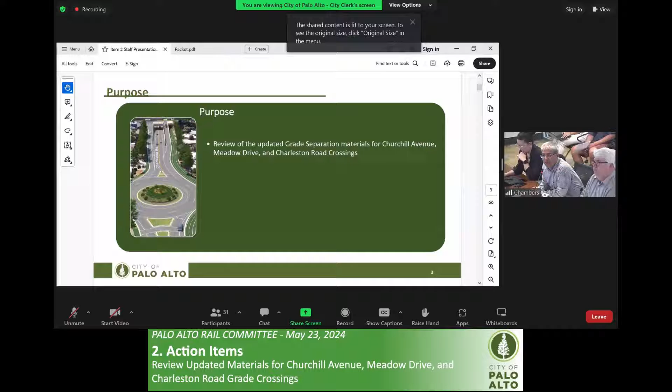So the main purpose of our project today is to review these updated grade separation materials that we have available. I'd like to note that the City Council just awarded the amendment on May 6th, so these updates are very recent and therefore available today to the audience as well as to the committee. We would like to highlight some of these changes that have been done over the last few weeks. Next slide, please.

For the benefit of our audience, I know we have a lot of new faces and we have been contacted by several residents in the project vicinity about the project. So the objective here is to share some of the background and perspective of the history on the project.

The project has been ongoing, like Chair mentioned earlier, about 10 years now. The project had to go through the community advisory panel and extended community advisory panel through the review processes of these different alternatives that were prepared. Heavy community involvement was there, and they helped us design some of these underpass alternatives, came up with these ideas which were refined further by our consultants. We have gotten extensive feedback and input from our community in refining those alternatives.

City Council in August and November of 2021 reviewed these recommendations from the extended community advisory panel and the concept plans, and selected a preferred alternative for Churchill Avenue as a partial underpass. For the Meadow and Charleston alternative, City Council selected 3 alternatives to be considered further for more studies and refinements, and to be brought back to the Rail Committee for discussions and reviews, so that the Rail Committee can make recommendations to the City Council for proceeding forward with the preferred alternatives.

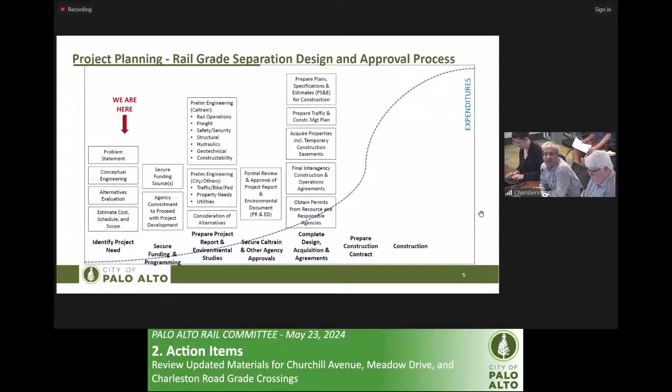In this phase, the planning for our project is just to get into the next phase for preliminary engineering and environmental review, where we can develop more details and look into the property impacts more carefully. Right now, we don't have any topographic surveys.

We do not have any property boundary lines. We are putting that based on very preliminary and aerial information that's available. So the project going into the preliminary engineering phase will allow us to do some more detailed design. The second thing I'd like to note is that this is a starting point from where we would be looking at refining further to reduce any impacts to the properties.

Like the Chair mentioned earlier, the City Council has already directed staff to reduce impacts onto the properties. That is one of the intents in the preliminary engineering phase: to get the design into more accurate detail and do more work to look into how we can refine it and reduce those impacts onto those properties—not just reduce impacts, but maybe eliminate the number of properties having right-of-way impacts.

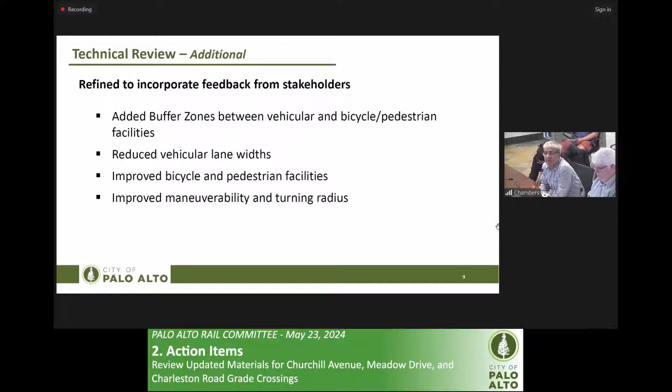City Council also asked staff to engage with Caltrain, and staff brought in Caltrain at different levels of communication, with city and county staff coordination group meetings and local policy makers group coordinations. In addition, we engaged them through the Caltrain corridor strategy project, which reviewed corridor-related standards and concerns up and down the corridor for different projects. We also had a special agreement with them to review our project plans and alternatives, and they provided feedback on those plans.

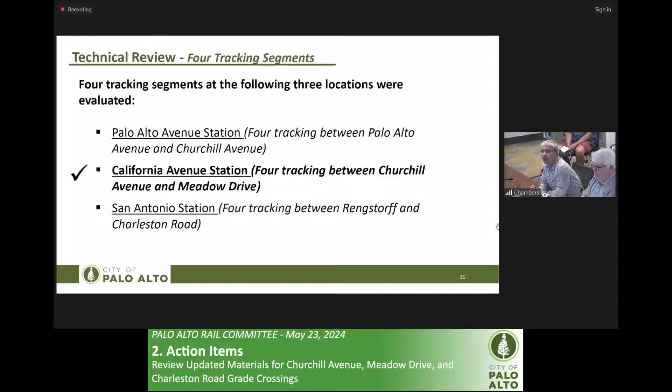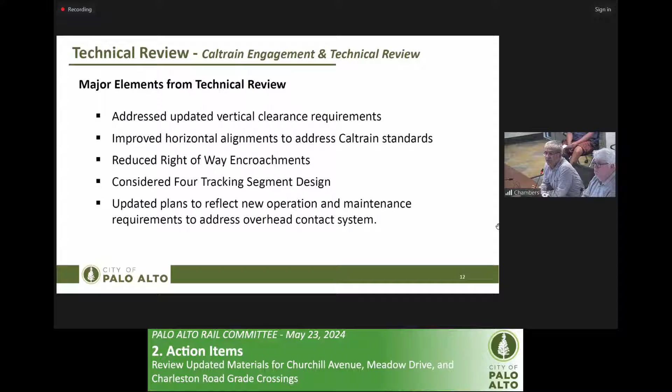They also provided several technical comments, some of which related to vertical clearance and standards. Caltrain had recently updated their standards, and now our projects are required to comply with those newer standards. We had to review our plans to ensure our designs could meet those requirements, or ask for a variance where needed. Vertical and horizontal alignments, right-of-way encroachment into the Caltrain right-of-way, and four-tracking segments were all looked at, from the operational and maintenance point of view, to make sure our future project would comply with the requirements.

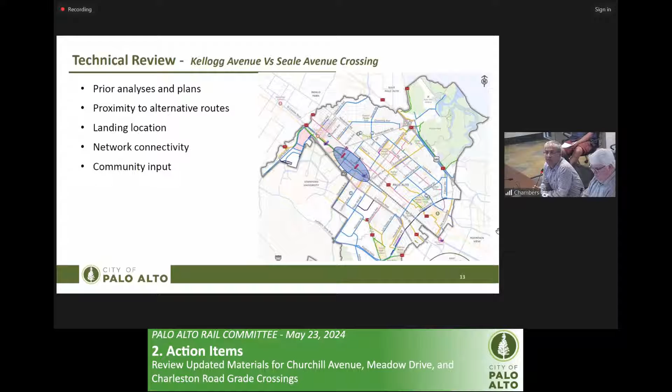Council also asked the Rail Committee and staff to look into the preferred crossing location for pedestrians and bicyclists for the Churchill partial underpass crossing. The two locations considered were the Kellogg Avenue crossing and the Seale Avenue crossing. Our bike and ped transportation analysis, with feedback from the community and input from outreach, along with other factors including existing plans and network connectivity, led to Seale Avenue being the preferred location. The Rail Committee has endorsed that location for recommendation to the City Council.

Finally, we understand how recently our community has been engaged on the property impacts. We'd just like to note that the project is still at a very early stage of development—if we were to look at a scale of 1 to 100, we are only at about 5% development stage. So this is a very early phase, and the project's intention is to understand which properties may be involved in those impacts, recognizing them early and having those conversations with the community. We are being transparent and open at this early stage so that people are involved and understand. The Rail Committee has also directed staff to reduce those property impacts as we define the design in our next phase of preliminary engineering.

So it's just a starting point—this is where those comments and impacts currently stand, and we are considering further reduction from this point to see how much we can work to reduce those impacts to those properties.

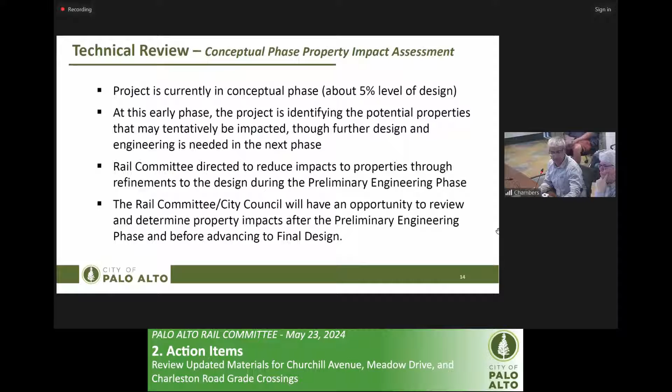Next slide, please. We'd like to note that our project does have both federal and state funding. Typically, these large infrastructure projects have federal and state funding involved, and the city has to follow strict and stringent requirements for real property acquisition processes, for evaluation as well as fair market value determination, and for negotiations with property owners if required, if property acquisition is required.

So as I mentioned, the grade separation project does have both CalSTA, which is the TIRCP funding we were talking about, the state funding, and the FRA agreement that the rail committee recommended today, which is federal funding. Both federal and state level funding are involved in this project.

Next slide, please. We do have some frequently asked questions, because the community has reached out with several property acquisition questions. This is a highly regulated area, and we have some projects that have recently gone through property acquisitions which provide good samples of the process. The frequently asked questions we're sharing here, and these links, can provide you with some commonly asked questions about the right-of-way acquisition negotiation process. We cannot get into the details of each property owner at this point because we don't have that level of detail, but typically it is done after the environmental impact report is completed, or it can be done concurrently if the Rail Committee or the council so desires.

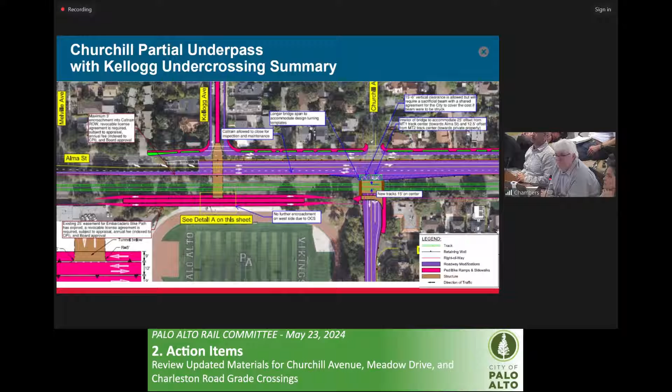This is a view looking south. I just want to touch upon the basis of the bridge and road geometry updates. We basically maintained the southbound track where it is today. We went 15 feet off that alignment for the northbound track. And then the edge of deck of the new bridge is 25 feet off of that to accommodate the spacing for the OCS poles and the maintenance road.

There's actually a cross section of this shown on an upcoming slide for Meadow. It's the same cross section. The total bridge width is about 55 feet. On previous renderings and exhibits, it was 45 feet. So it's a little bit wider now again to accommodate that maintenance road.

This results in, after all those dimensions are settled, a minor 3-foot encroachment of Alma Street inside the Caltrain right-of-way. So there is still some encroachment, but meeting Caltrain's requirements, we're relatively comfortable, and I think they've given even verbal concurrence that the geometry looks good. Next slide.

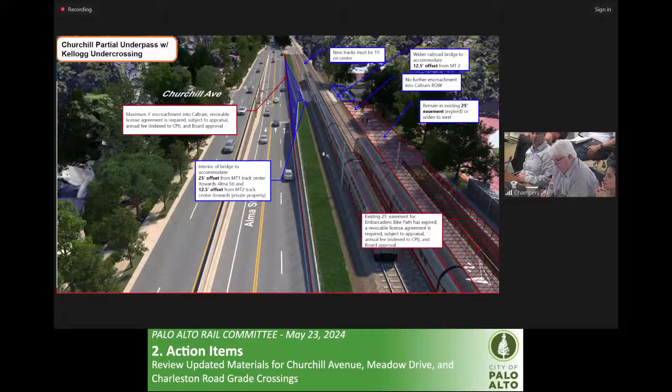This slide here is just a summary of the items we just discussed. I'm not going to go ahead and read all of them, but we could go ahead to the next slide.

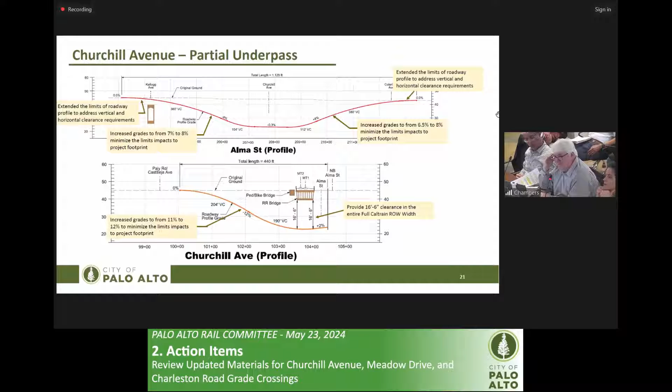These are the revised road profiles to accommodate the additional foot of vertical clearance. There's a slight increase in the maximum grades in the project footprint. I could give you those details if you have questions about that later. I want to keep this presentation moving along because there's almost 40 slides, so I want to keep this as brief as possible. Again, if you have further questions and details about this, feel free to ask.

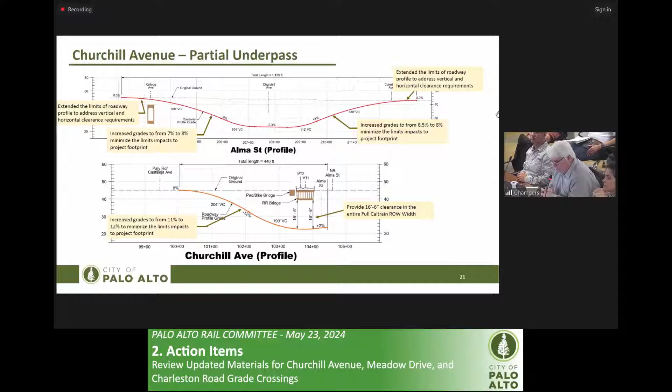Now, I think these grades are a little bit alarming to some, and I just want to remind everyone that pedestrians and bicyclists will not have to navigate these grades since there's a ped bike tunnel currently planned at Kellogg Avenue. Next slide.

Next slide. Here's some of the updated 3D renderings. This is looking northwest towards Pali High in the background. This is a pretty good view of the longer span and maintenance road. You could see there on the bridge, shown in that light tan color.

The right lane on southbound Alma is proposed to be striped with a 2-foot shoulder next to the retaining wall. Again, the spacing is really tight now with the additional width needed for that maintenance road.

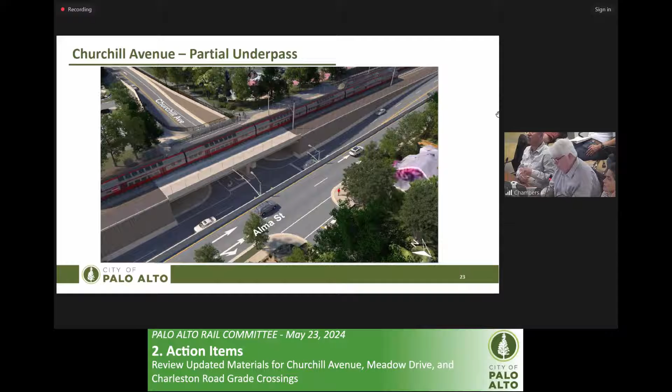Next slide. Here's a couple more views of the 3D model. On the left is looking north from Coleridge, and on the right is a view of the Ped Bike Tunnel at Kellogg from Pali High.

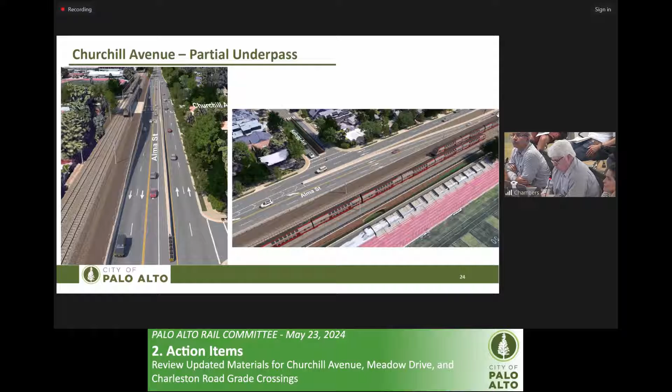Next slide. The image on the left is actually a duplicate from the previous slide, and the image on the right is another view looking north, a little bit zoomed in closer to that lower Churchill-Alma intersection. Next slide.

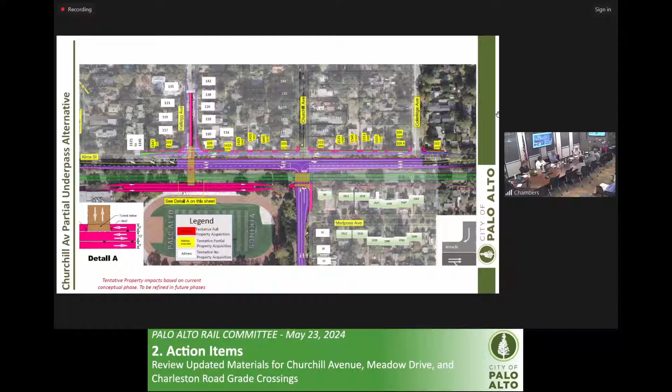Chair, I'd like to note that as part of the city rail committee's recommendations to reduce, we are considering a 1-lane option, and we will be reviewing that in our preliminary engineering phase, to see how northbound on Alma Street, north of Coleridge, would work from a traffic perspective, but there are other elements associated with the design that need to be considered. So as part of our preliminary engineering design, that, and also shoulder widths and other encroachments into the Caltrain, we will still be working with Caltrain to see if we can have additional encroachment, if feasible, by a foot or two, and that might help reduce some of those reductions.

And that shoulder width southbound is now only 5 feet. That's actually the northbound. It's in the lowered section. If we could maybe go back to the previous slide, we could show that real quick.

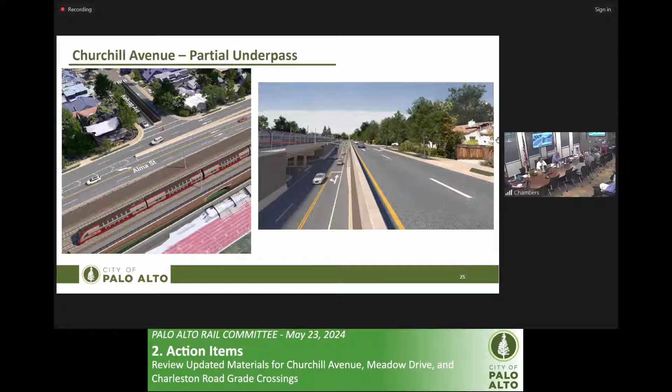I think it's slide 20 or 21. Yeah, 22 maybe? Yeah, there it is.

That is northbound, in the lowered northbound section, through and left lane. It dips down, but it's in the northbound direction. Because there's only 1 lane in the northbound direction, there will be some shoulder to allow for any crippled vehicle to stay on.

There's a few different ways you could lay out the dimension of this. For example, I originally had it laid out with an 11-foot lane next to the wall. And Rippon said, hey, we really should have some shy distance off the wall. I agreed that's probably a better idea, and then we took that extra 2 or 3 feet off, and there was another foot. We gained 3 feet somehow, I forget where the other foot went, but anyway, we adjusted the dimension slightly there.

I just have a technical question, if I may. I'm confused. So northbound Alma in this area, there is both a depressed lane and an upper lane. That's correct - the depressed lane is if you're trying to turn into... That's right. Okay, you got it. Yeah, I missed that. Okay, thank you.

So we go back to slide 26, I think is where we left off. The property impacts - this is a graphic summary of the property impacts, and there's really nothing new to report here. The curb line that we showed at the previous meeting along those homes on Alma Street has not been moved, we kept that where it was before. This results in 15 partial acquisitions between Melville and Lowell, as you can see here indicated in the yellow highlighted color.

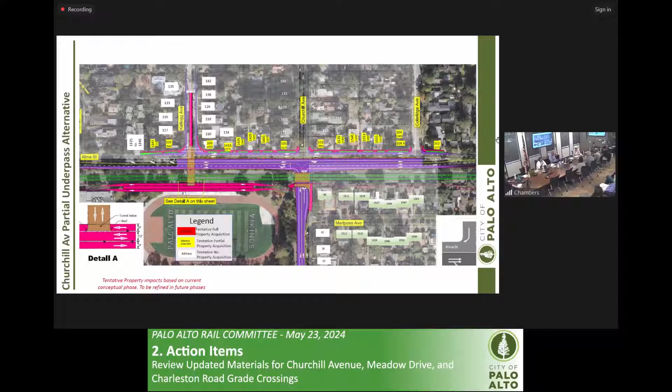So as we did at Churchill, the bridge is slightly wider to accommodate the maintenance road on the Alma side of the tracks. And due to the jogs in the right of way at this location, Caltrain requested that the tracks be shifted slightly to the west. Again, this is related to preservation of the right of way and the alignment for the 4 tracks just north of here. So we made those revisions, and then these revisions also include that 1 foot additional vertical clearance that we mentioned before at Churchill. That applies everywhere - that 16 feet 6 inch new requirement.

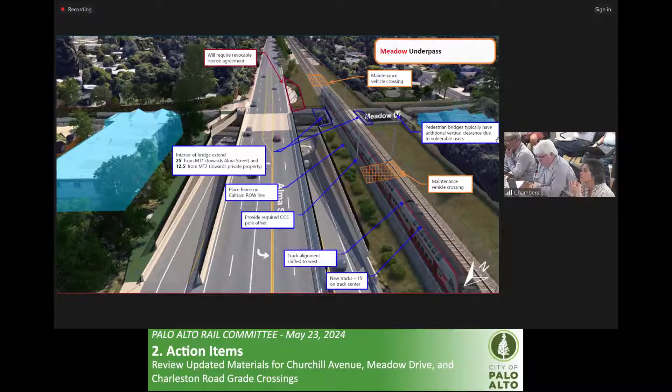Again, this is just a summary of the Caltrain comments with the view looking south, with some of the points made previously. And we have some renderings here to share. Next slide.

Yeah, this is just a slide summarizing the revisions that we made. Discussed that already. Next slide.

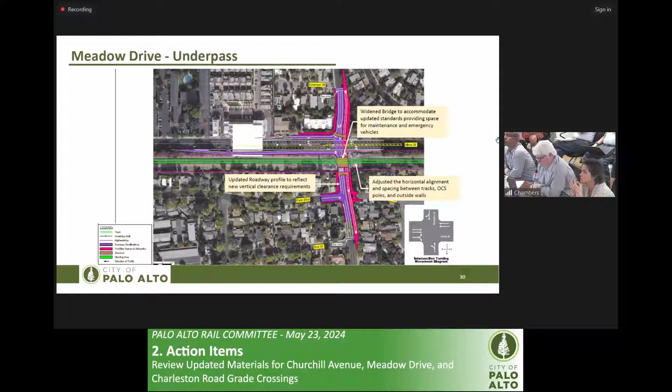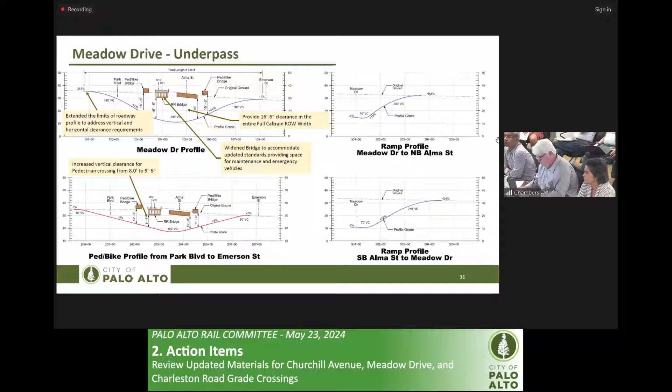Next slide. Here's the typical section of the railroad bridge that I was mentioning earlier. These are the same dimensions used at Churchill. It's got a total width - the text is a little hard to read - I think it's 54.5. So you can see there that 12-foot width is for the maintenance road on the left, and the 13-foot spacing from the pole to the center of the northbound track, 15-foot spacing to the southbound track, and then 12.5. Yeah, the cross section on the lower right.

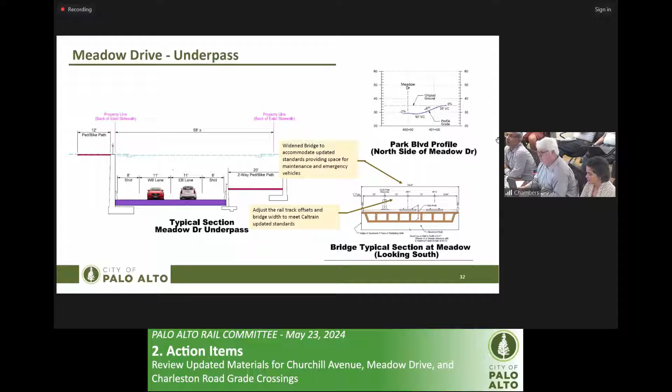Okay, next slide. Here's some renderings. This is a view looking southeast from Park Boulevard. We found a slight error on this that we're currently looking to update before the June City Council meeting. The maintenance road here is shown on the west side of the tracks - it should be shown on the east side like it's shown at Churchill. So we'll get that fixed up for the next council meeting.

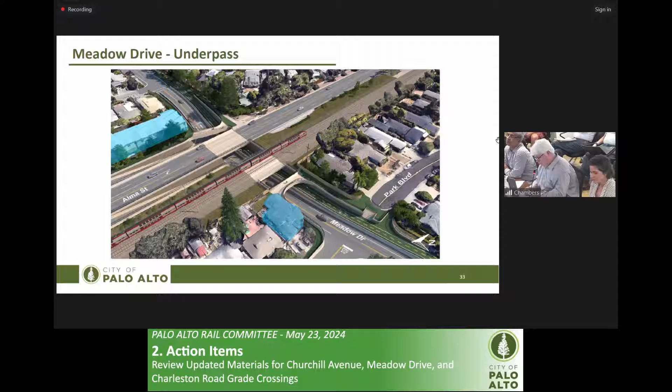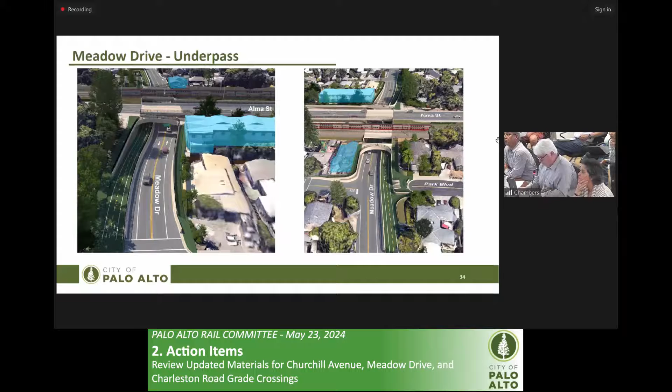This is a view again for the meadow, looking north. Again, really no change to the road geometry here, so this shouldn't be anything new on this slide.

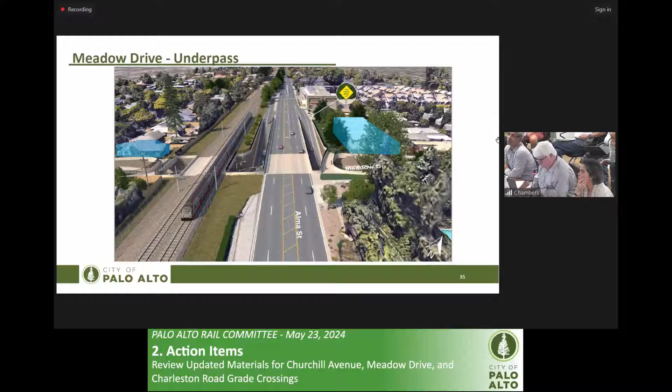All right, that's all we have at Meadow. Should we move on to Charleston? All right, let's do it. Next slide, please.

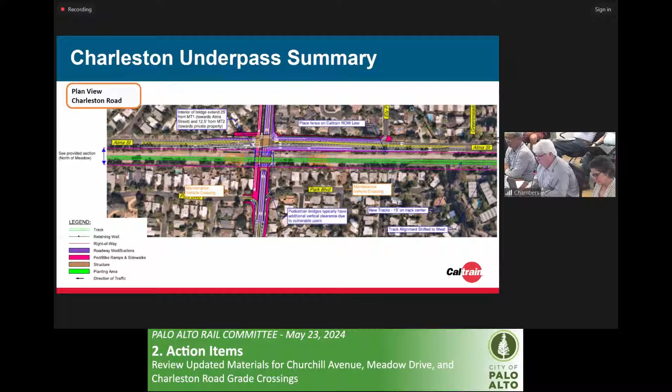This is essentially a carbon copy of Meadow. Again, there's a shift of the tracks to the west slightly and a wider bridge to accommodate the maintenance road. These changes, as I mentioned before, show the new vertical clearance requirement by Caltrain.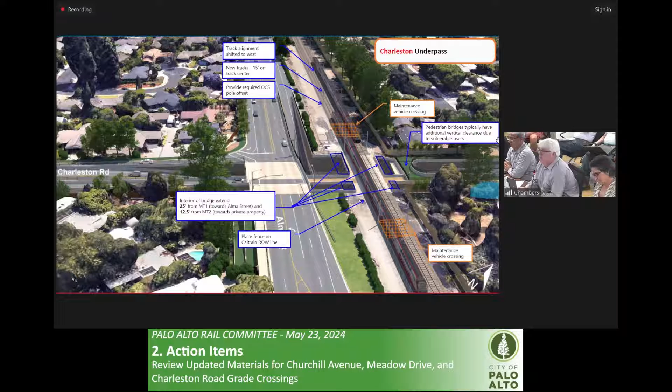Here's a view looking south of the revisions that we just talked about. This is a summary of the revisions in the plan view exhibit, and this is just an overall view of the project. At this 10,000 foot level, there's really not a noticeable change.

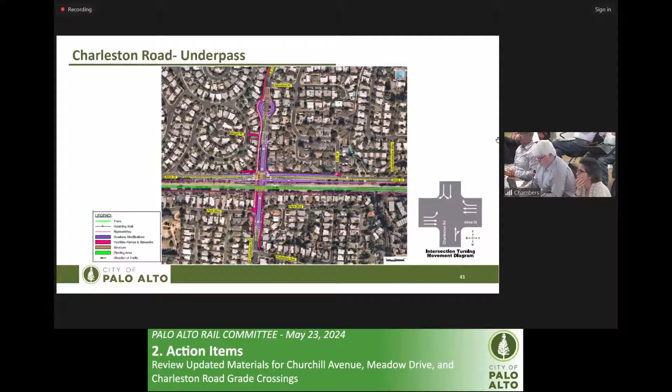These are the updated road profiles. The length of the Charleston profile increased just a very small amount. Same at Meadow, it just increased a small amount, I think by about 2%, from about 710 feet to about 725. I was a little surprised that it wasn't more significant than that, but that's what it came to.

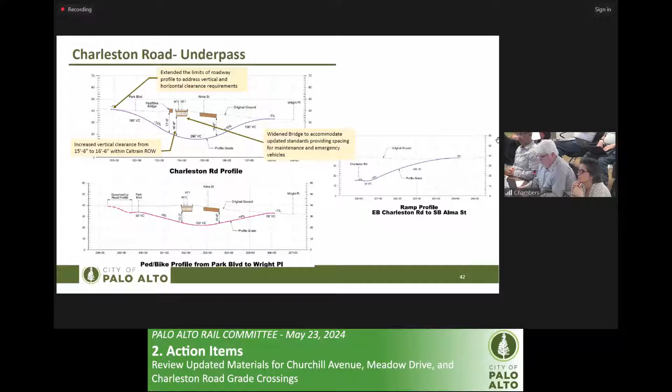These are the typical section of Charleston. Again, no change here. This is what has been presented before at previous meetings.

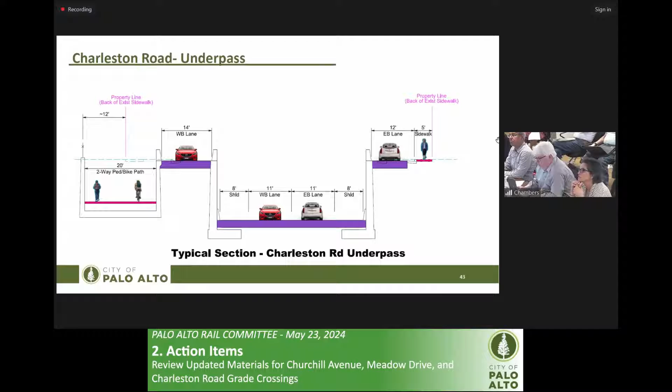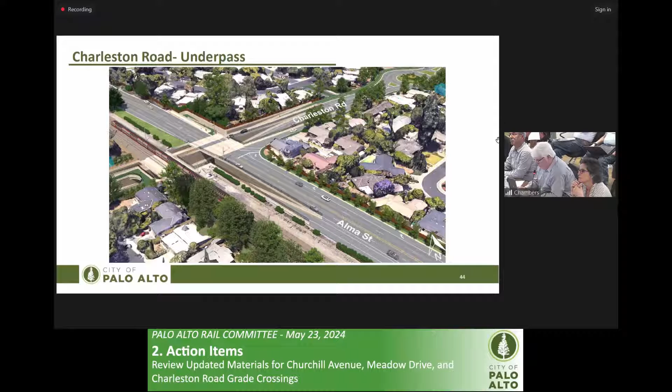Here's an updated rendering looking northeast from Park Boulevard. Again, I apologize, same as we have in Meadow, we have the maintenance road shown on the wrong side of the track, so that will get cleaned up for the next meeting.

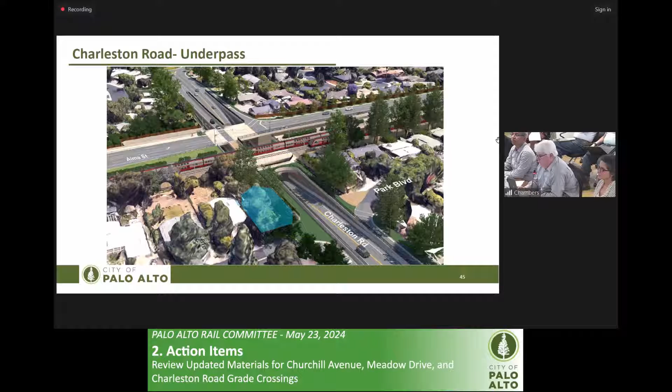This is a view looking southeast from Park. Again, you can see the wider railroad bridge there in the middle of the screen. View on the left, that's looking west, and view on the right is an aerial also looking west.

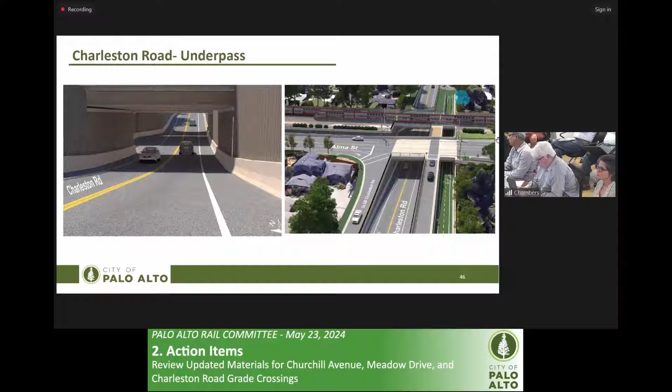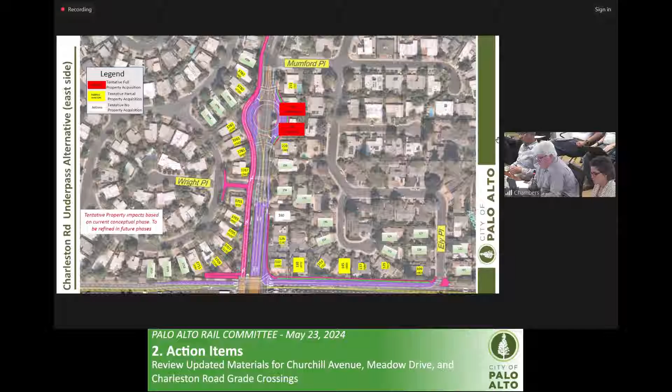Next, we're going to talk about the Meadow Charleston hybrid. Could you just add up the total and fulls for Charleston? At Charleston, I believe there's 30 partial acquisitions, 8 on the west, 22 on the east, and 3 full acquisitions total, 1 on the west, 2 on the east.

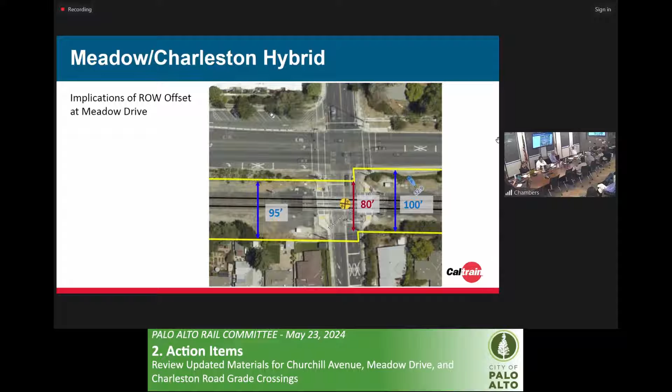Due to the jog here in the right of way, shown here in yellow at Meadow, again, Caltrain is proposing a shift of the tracks to the west as we described before. This is just an overview of Caltrain's comments for the Meadow Charleston hybrid here at Meadow, and similar to the Meadow Charleston underpass, we revised the design to accommodate the shift of the tracks, the maintenance road, and the new vertical clearance requirement.

I wanted to make note of something that really needs to be described here. The previous versions of these renderings and exhibits show the retaining walls located on each side of the track about 15 feet from the center of the track. So this updated version, based on Caltrain's comments, they requested the east wall, that's the wall that abuts up against Alma Street, be on the right-of-way line, and they want the embankment built up all the way to that wall to use that space for potential siding or whatever they want to use it for.

So I think when you see these renderings coming up soon, it's going to probably look like a little of a shock to you, but that's the reason why. And then the wall on the other side, on the west side, on the Park Boulevard side, that wall is set 10 feet off of the right-of-way line, and they want that 10 feet of space for maintenance access.

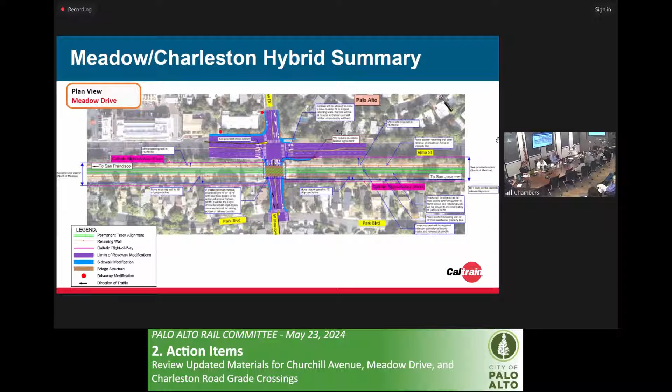These are an overview of the similar comments at Charleston. I'm not going to go through each one, but it's very similar to what was described previously at Meadow. One subtle difference here at Charleston is that there'll be some encroachment onto Caltrain's right-of-way, shown with red hatching for the southbound right turn lane from Alma onto Charleston. That essentially mimics the existing condition.

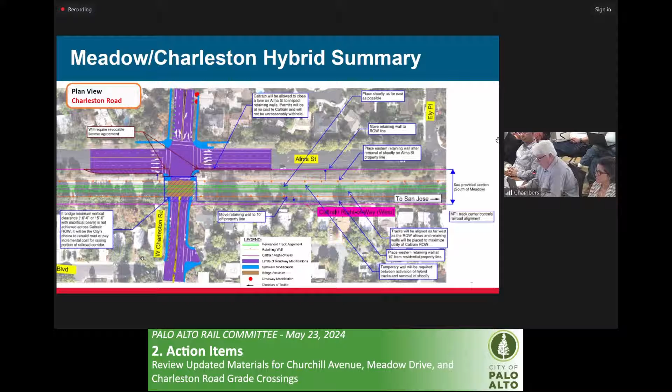Next slide. Here's the summary of the design revisions at Meadow. And the road profile revisions at Meadow.

We took the liberty of trying to improve this, since we had to revise it anyway for the vertical clearance, to try to reduce the profile limits. So the profile limits were actually reduced from what we showed previously.

Peter, just for folks unfamiliar with what we mean by a hybrid, maybe we better explain that. Yeah, absolutely. So hybrid means partially raising the tracks in elevation and partially lowering the road in elevation to achieve that 16-foot, 6-inch vertical clearance.

There are many hybrids along the Caltrain corridor. Holly Street is one. Brittan, I believe, as well. I think the 25th Avenue one recently constructed is also a hybrid.

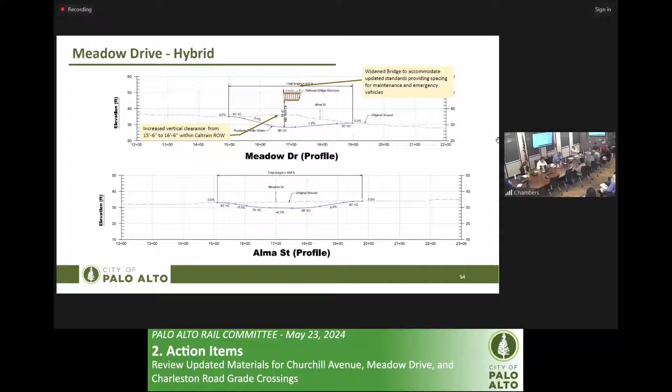In this case, I believe the raise in the rail is about 15 to 17 feet, on that order. And the road is getting lowered, looks like about 6 or 7 feet. Is it 6 feet? Okay, 6 feet. There's 6 and 14, so that makes 20. I think it was originally that, but the structure depth went up, so it's a little more than 20 difference. But it's on the order of those numbers.

Okay, next slide. Here are some updated renderings for this alternative, and this is kind of what I meant by a little bit shocking to see the first time, because you see this wide expanse of embankment with nothing there, but that was based on Caltrain's comments to have the wall built up right against the right of way.

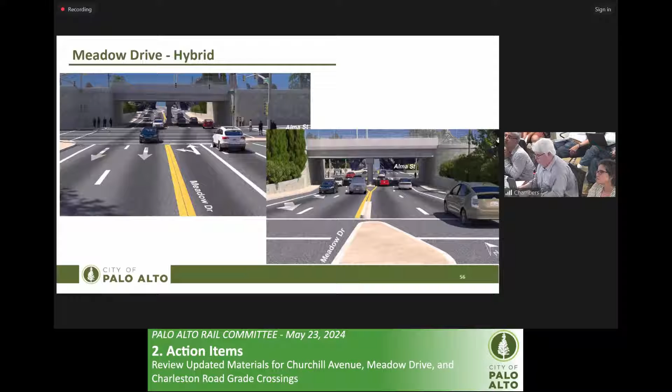Next slide, thank you. On the left, this is a view looking west, and on the right, a view looking east on Meadow towards the bridge. Next slide. Here's an aerial view looking north at the Alma Meadow intersection.

Can you go back to that slide real quick? Sorry. Yes, on this rendering in the 3D model, they actually have the maintenance road on the correct side, so this one is shown correctly. So we're good there.

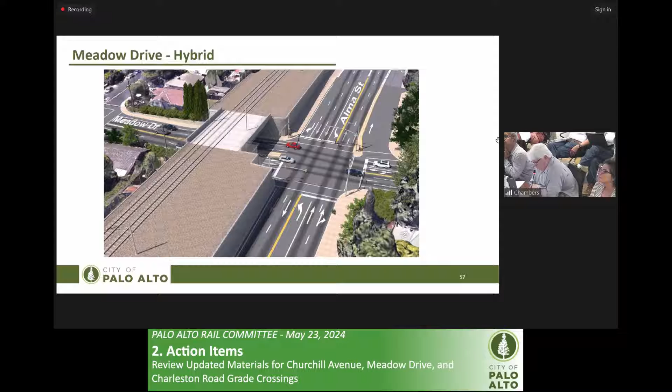Sorry, next slide. This is just a summary of the design revisions here for the Meadow Charleston hybrid at Charleston Road.

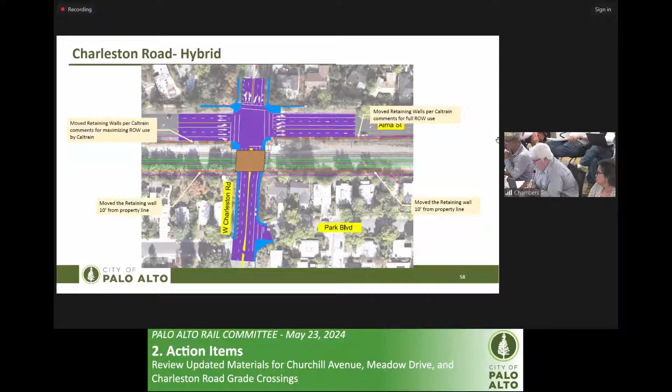Next slide. And these are the revised road profiles of Alma and Charleston. Oh, I didn't realize we hit - yeah, one more slide. This is just a rendering looking south at Charleston, again with the wider bridge for the maintenance road.

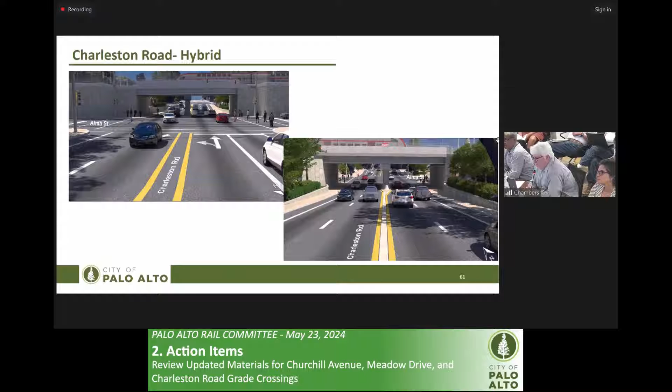At Charleston, again, similar renderings that we had at Meadow, looking west on the left and looking east on the lower right. And this is just an aerial view looking towards the northwest, towards Park Boulevard.

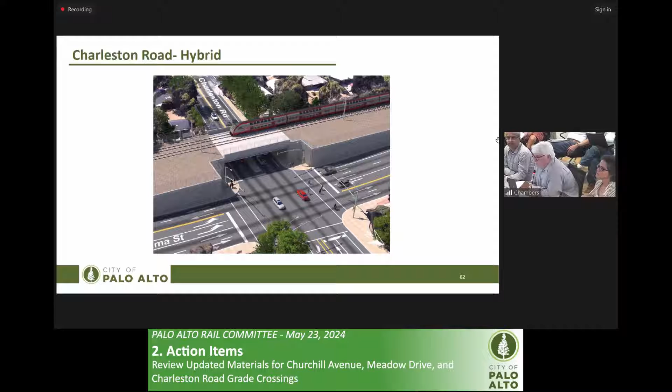All right, and I'll hand this over to Ripon. All right, so we did-

The Rail Committee and the council also wanted us to look into the costs, and since the last update was from 2018, we based costs on 2025 estimates with 3% inflation from 2018 to 2025. Those previous estimates and ranges are in the first two columns. AECOM helped us look at those costs for more recent numbers based on more recent estimates and developed a cost estimate, shown in the 2024 column, which is current day cost based on current estimates and the current bidding environment.

We noticed it's up anywhere from 50 to 60% for alternatives, which is actually in line with what most other cities are finding in the recent bid environment, that costs have gone up about 40 to 70% from their engineer's estimates for projects that were bid.

And every column thereafter shows a 4% increase. We have assumed a 4% inflation rate for the next 7 years. And 2031 is our earliest construction feasibility if we are on an expedited schedule and funding is no constraint, and if everything goes well. That would be the estimates for 2031.

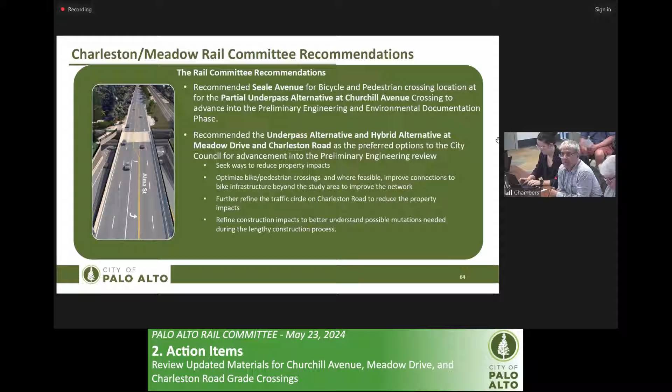Finally, we'd like to note that at the April rail committee meeting, the rail committee recommended to move forward with Seale as a preferred crossing for the partial underpass at Churchill Avenue. For Meadow and Charleston, Rail Committee recommended moving forward with the underpass and hybrid alternative to advance into preliminary engineering and environmental phase, and also directed staff to reduce property impacts, optimize bicycle and pedestrian facilities, and look into the traffic circle and construction impacts for Charleston—more specific direction on refinements as we get into the preliminary engineering phase.

Next slide, please. Finally, the next steps are to go to city council on June 10th and seek their review and direction on proceeding with a preferred alternative for Meadow and Charleston, and also a preferred location for pedestrian crossing at Churchill Avenue. In addition, the Rail Committee just approved the FRA agreement, which will be on our horizon for approval from the city council. That concludes our staff report.

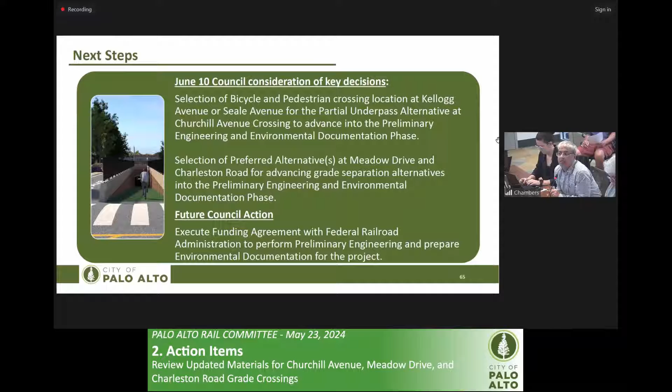Thank you. Okay, so we'll go back to questions from the committee, then go to members of the public, and discuss after hearing from the public. Any questions on any of the other slides, technical issues?

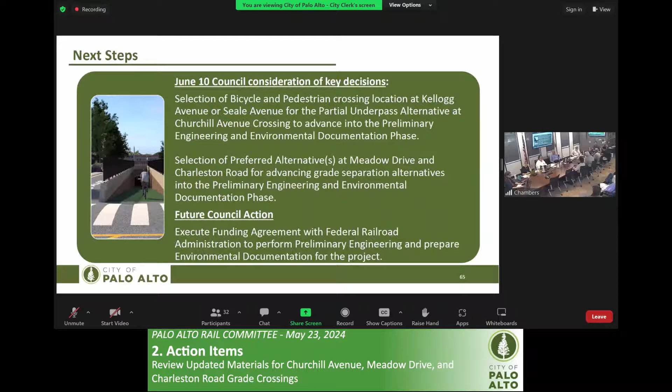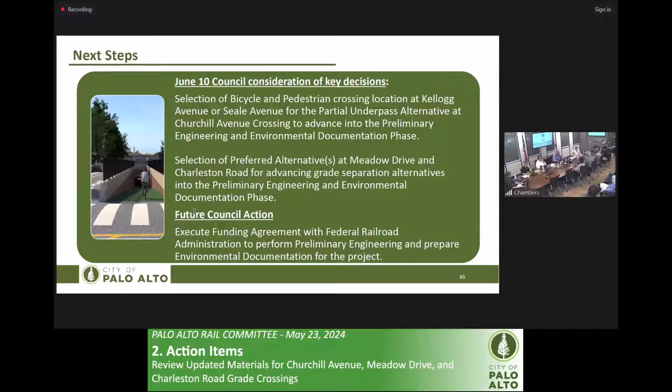I think it would help everyone understand if we could see it, if I can give you the slide number. I think it's slide 36. If you just type in 36 and hit enter. Thank you.

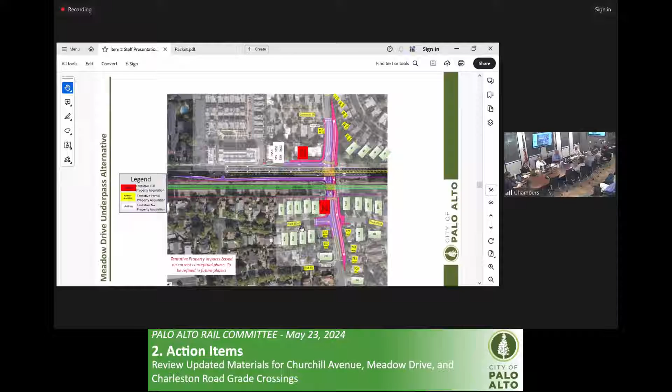So originally, when this was laid out, this was not considered a full acquisition at that parcel you're referring to. But it required some acquisition of the parcel on the south side of Meadow. So it was almost like a little bit of each parcel. But we knew with this alternative that we were going to have to acquire that apartment building, because the road is so much lower at that apartment building that we can't regrade the driveways there.

So there was a comment, I want to say a couple of years ago, to realign Meadow to the north. It's like, okay, we're going to try to minimize any impacts to the south side. So that's why the north side was chosen, because of that apartment building. So there's a little bit of history there with the design. It's a little bit subtle, but there's like an S curve with Meadow here, it's not straight. So it was a subtle engineering change we made, I want to say like in 2021 or 2022. That was the rationale behind that.

So the 4097 home, on the west side, is it on the north side? I'm looking at 4097 west. Yes, it's on the west side, on the north side of Meadow, right? That's the piece I'm asking about. Yes. So the alignment got shifted closer to that home to avoid or minimize the impacts to the south side of Meadow. To the homes on the south side of Meadow?

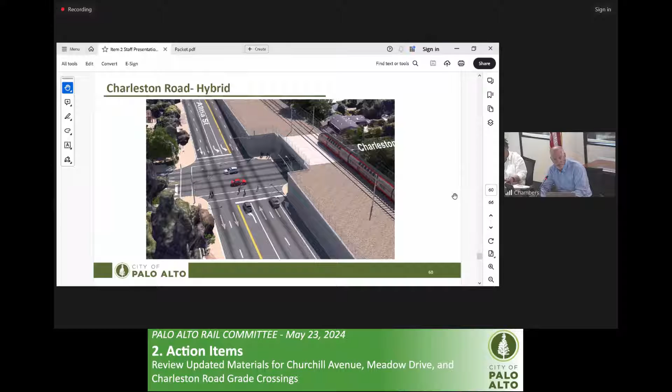Can we pull up slide 60? My question is, this now shows the berm, not essentially a 2-track berm, but the entire width of the right of way. Can you refresh us on why the berm is so wide? I know Caltrain had wanted access, but that doesn't require a roadway parallel for maintenance, and that doesn't require coming all the way out to Alma. So what's the reasoning on that?

So Caltrain requires the utility of the existing right of way in the permanent conditions, and that requires us to provide them the same elevation for the entire right of way width. That's what they had required. We'll have to go back and wrestle with them to ask for less, but this is what that impact would cause. Okay, so we're taking that as a given because at this point in time that's Caltrain's position.

But as we discussed, there are things that are preferences of Caltrain and actual needs, and I'd put this in the category of a preference. When we first looked at hybrid, it was not going all the way out to Alma. It's still the impact visually on the community of basically an earthen wall running through a mile or so of the community, a big, complete physical divide dividing the community in half. So that's one of the downsides to that, in addition to the traffic one.

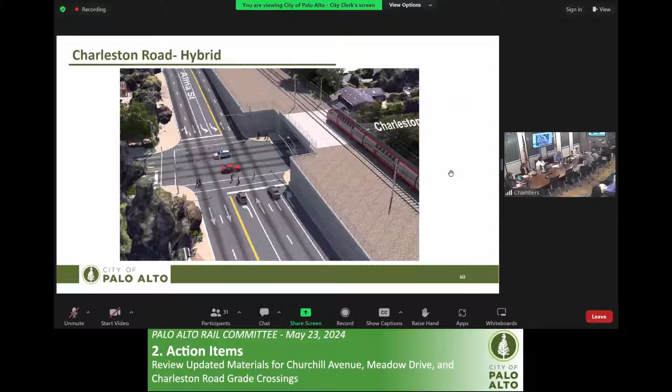Okay, that way it's helpful. I think the typicals are on 22. 22, okay. Is that what you want to see, the typical section? I was gonna show on the plan. Yeah.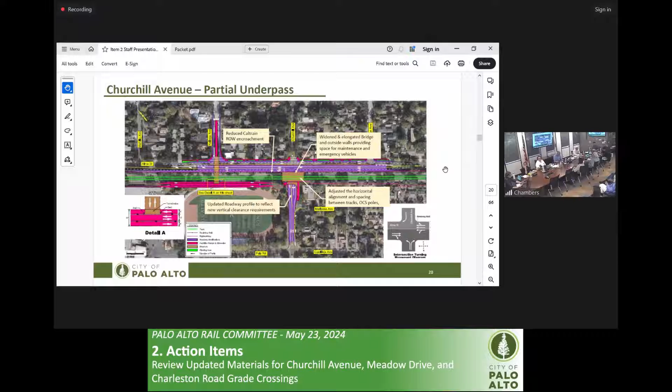So thank you, Chair, for that question. Currently, as proposed, it shifts the sidewalk back about 4 feet, providing a total of 9 feet between face of curb and the back of the walk. So when you say it shifts it back, it moved the sidewalk 4 feet into the private properties. Correct, that's how it is currently proposed, and provides the minimum width of the buffer about 4 feet. That allows for planting of some trees and bushes that gives some separation between the homes and the traffic. Second, it also provides room for undergrounding all the overhead electrical lines and some of the space requirements for those. So those are some of the reasons.

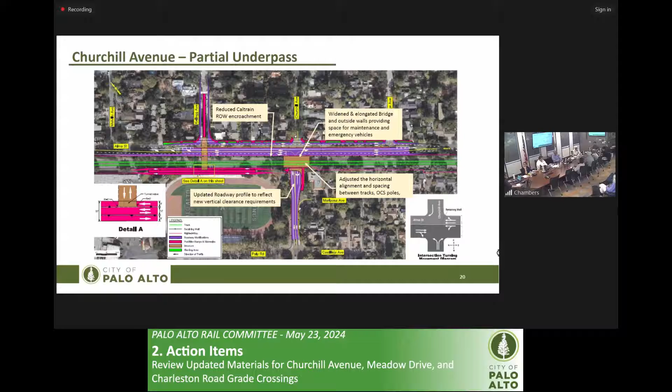And it also provides safety for northbound traffic. I think the Rail Committee unanimously wanted to see that buffer for that safety perspective between the bicycle and pedestrian traffic from the northbound traffic moving on those. So it would shrink the planting strip by 6 feet and intrude into the private properties by 4 feet. That is correct, and Peter, correct me if I'm wrong. Yep, that's correct. If you want to skip to slide 22, we have a nice typical section that shows that on the upper right. There's a way to zoom in on that, upper right.

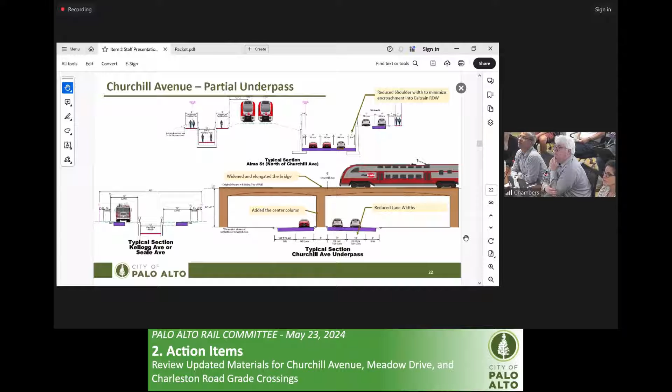If you zoom in, you can kind of see where the existing sidewalk is. That label's hiding the right-of-way lines. But anyway, you're right, Councilmember Burt, that it's a shift of the sidewalk 4 feet, basically a 4 foot shift of the sidewalk.

So it's encroaching 4 feet into their property. And shrinking the planting strip by 6 feet? Yeah, I think it was the existing 10 feet. If existing is 10, we're shrinking it by 6, so it's a 4 foot intrusion into the property.

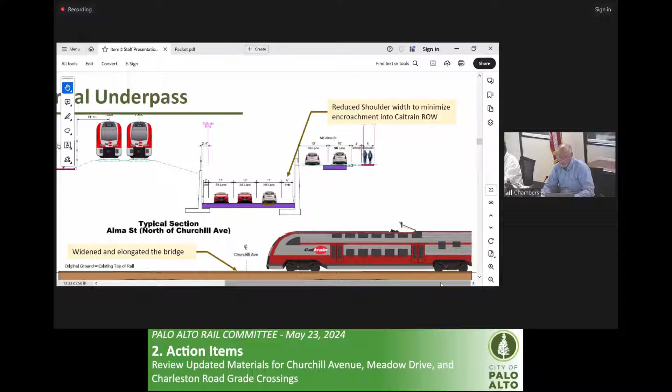Okay. And I think we're hopeful that through some of these other design factors, we may not have that 4 feet. Doesn't mean we wouldn't lose some of the planting strip, but you mentioned, Ripon, that we have utilities currently in the planting strip. The assumption we have right now is that we'd actually need to underground those. Correct, which is a net benefit in some ways.

And yes, we did hear from some of those fronting property owners that those poles were kind of ugly. Oh, everybody with above ground utilities wants to be on the list for undergrounding.

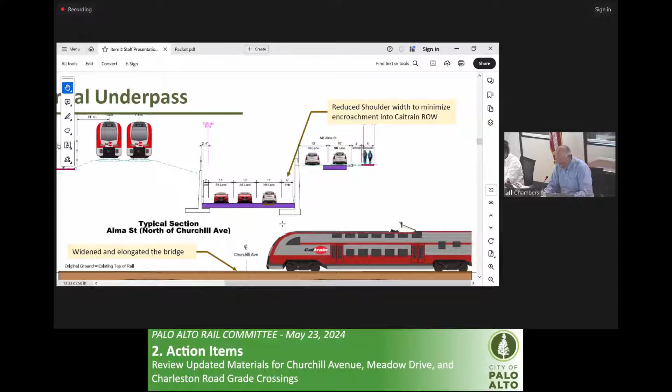Let's see, those are my primary questions. So unless anybody has any more, how many speakers do we have? We have 14 speakers. Okay, let me do a time check. We're scheduled to end at what time? 5:30.

Well, so we have a hard stop at 5:30. Ripon, can you review what, out of this, we don't need to really provide additional direction to the council for June 10th unless we want to incorporate some of these new developments in our recommendations, right? That's correct.

It isn't one of them I would say the elephant in the room, but the elephant's gone, which is all the money. So doesn't that raise the issue of whether we want to look at 3 or go down to 2, or push some things out for a year? I mean, those are pretty big decisions. So do we want to talk about that today?

If so, we need time. We don't have another opportunity as a rail committee to do that before the council meeting. So I think we'll at least want to have some preliminary discussion on whether we want to make any recommendations to the council.

Okay, Chair, so we need time for that. When Vice Mayor said 2 or 3, I can relate to that. What exactly was he talking about? On the Charleston East Meadow alternatives, whether we were intending to narrow it to 2 preferred alternatives. Do we still need to make that decision on June 10th, given what has changed on the TIRCP funding?

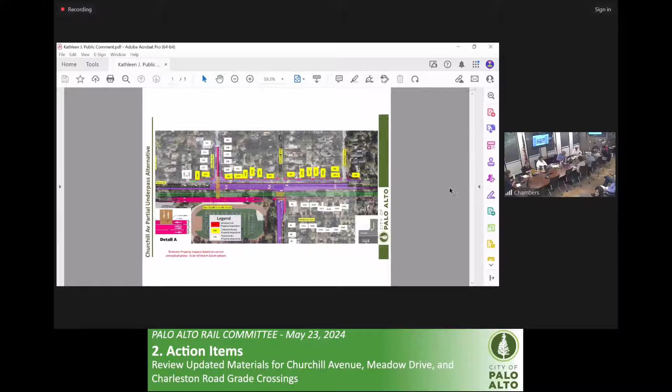So I'm just going to stop with that, but that's how I'm feeling. I went to the XCAP meetings, I went to Lucy Stern Center, many of our neighbors did, and both Greg Tanaka and Lydia Kou were on record saying, look, we don't want to take homes through eminent domain. That's just not something we will support. That made us feel better. We knew we were going to have the construction noise, the disruption, but we were going to be safe in our homes.

This map that was produced for the first time, that you're seeing on the screen on April 29th, was a shock. Because Greg Tanaka and Lydia Kou - sorry, people I have a lot of faith in - told me it wasn't going to happen. And I went and asked those questions. I'm sorry, I'm emotional. This is a home where I raised my son. It's a multi-generational home. It's a home I'm planning on living in.

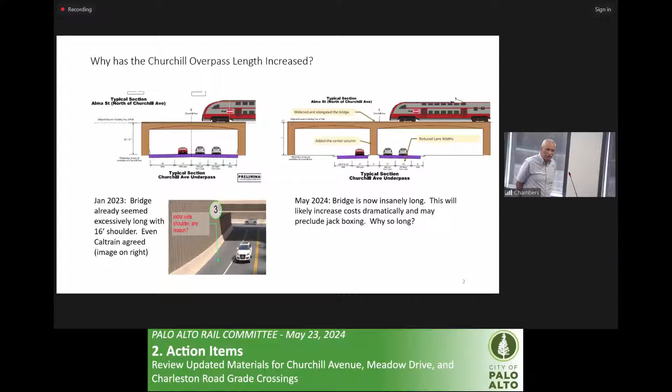The Churchill overpass length has dramatically increased. In January, it was shown here on the lower left image with a 16-foot shoulder, and Caltrain asked why it was so large. It's now much wider, and that's going to make it much more expensive, and it's probably going to preclude jackboxing, because you need to assemble the box before you jack it into place.

So it would be alternative to move the 1-lane section all the way back to Churchill and avoid the 16 partial property acquisitions.

Another option to mitigate this, which I think you're already doing some of, is to reduce the shoulder. It's an 8-foot shoulder. In the previous design, I think you moved it down to 5. It could be 2, and you could also move the pole onto the top of the railing as Caltrain suggested.

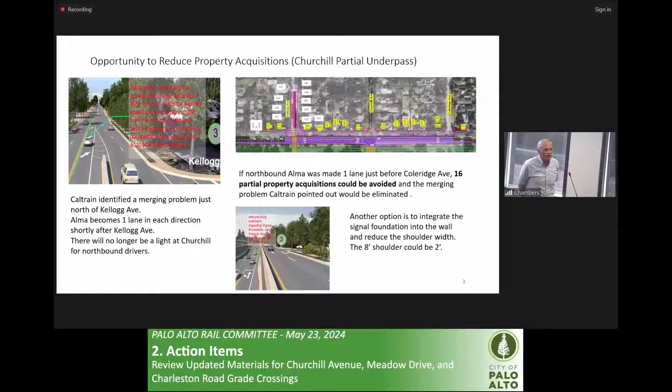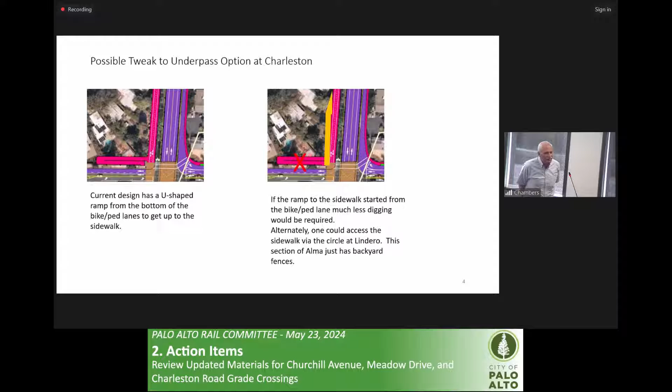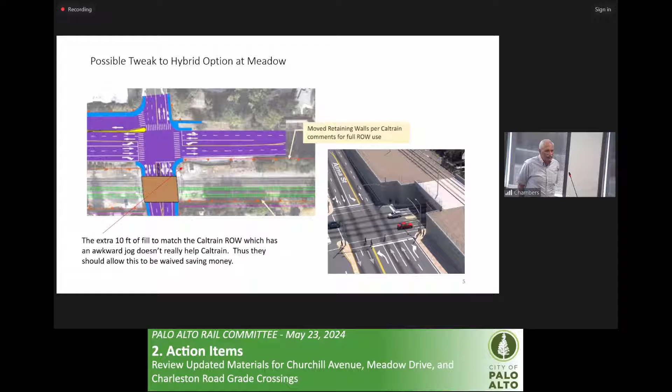I think this has already been discussed. I think you should pursue with Caltrain—it doesn't make sense that they need this extra 10 feet of landing just because of the jog in the road. By eliminating it, they will also allow them to inspect the wall, which is something they've asked for the ability to do.

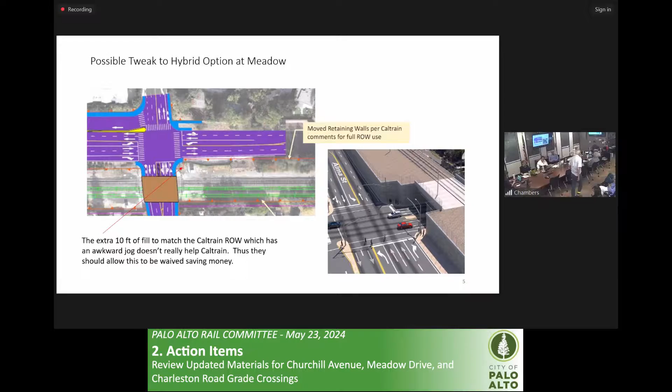Hi, my name's Sean. I know this may be an unpopular opinion, but I'm thinking we need to consider voting to actually remove the partial underpass as an alternative for Churchill.

I've heard a lot of the concerns around us having no money and us delaying decisions. We just keep pushing this out. We've been here many years—pre-COVID, during COVID, whether in person in the other room or remote through Zoom. But the fact is there's no money, and we just keep pushing out this decision, and no one's going to make it.

So if we can make it here, that's great. If we can make it on the 10th, that's great. I would strongly want everyone to consider just closing down to Churchill and focusing on the bike path, getting the kids safely from Old Palo Alto to Paly. That's kind of my priority here today. Hopefully you guys hear us. There's a lot more people to come, but I'm hoping for a decision sooner than later.